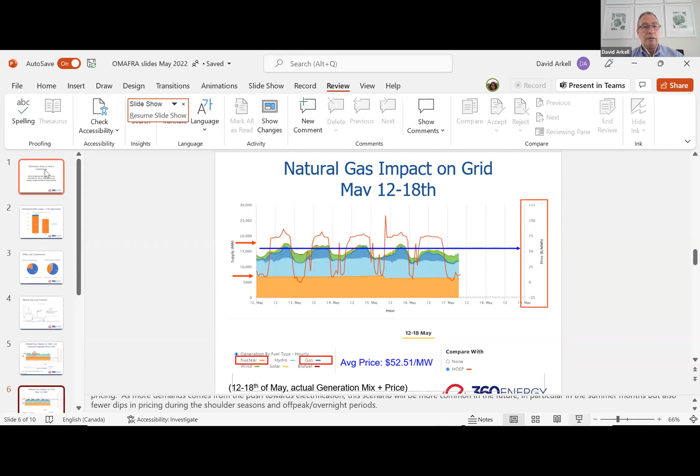Thank you again, and I guess really my job is to set the table for our two other guest speakers, because they're going to be talking about technology that you'll want to be looking into as the markets continually evolve and change. So my message to all the listeners is that it's really important when you're looking at technology that you and the pending suppliers have a full understanding of how you use energy and also future energy pricing. What I'm tasked to do today is to give you a heads up on where the market is, examples, and then what things you should be thinking about when you're looking at these different technologies.

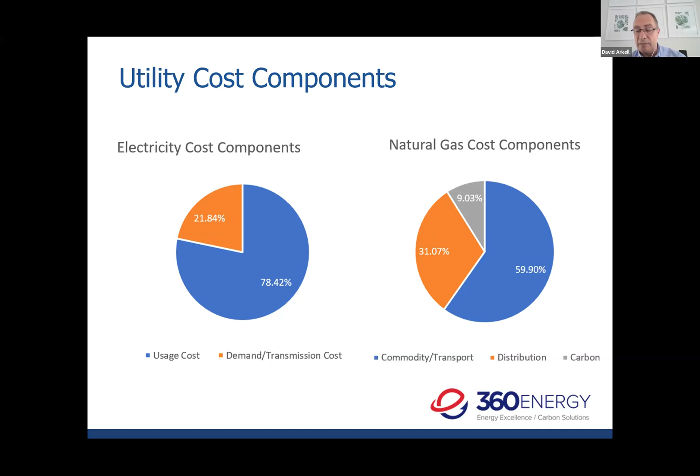And for natural gas, you can see we've broken it into three separate areas. We've included the commodity and transportation together, and then the distribution, that would be your local distribution company, their breakdown, and then there's a carbon cost associated with that, which you may also be mindful of and that may be impacted by technology you choose going forward.

Since the pandemic, if everyone can recall, oil for a day or so was trading minus $40 a barrel. And that impacted natural gas pricing itself, but it also scared some producers from drilling and doing additional development of natural gas. Then on top of that, in Europe, there was a shortage of natural gas. The money being spent for natural gas is far higher than what it is in North America. So natural gas producers started to export their gas, called liquefied natural gas, to Europe and Asia. And that started to force pricing up.

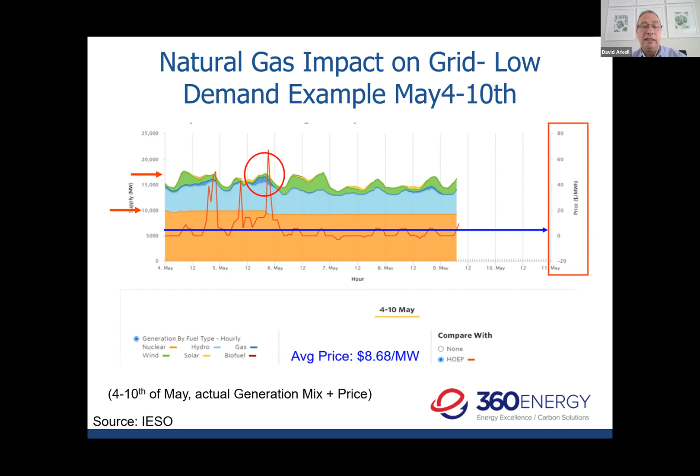During that period from May 4th to 10th, the average pricing in Ontario for the electrical market was less than a penny. Remember, there's transmission and distribution costs on top of the commodity. But in summary, it was pretty cheap. And that has been the case for many years because we've had excess supply of generation, and quite frankly, natural gas has been cheap. So I want to give you a heads up on how things change in the marketplace and how you have to be mindful of how this impacts what you want to consider in the future.

And I apologize for the spelling error. It's May 12th to the 18th. This is the next week, and it's a whole different game. So I want to share with you a couple things. Again, those are generation assets that are used to produce power. The red line is the actual hourly market price.

So one thing I want to bring to your attention: in May 12th to 18th, the nuclear assets that are used to generate power shrank significantly. And when they shrink, there have to be generation assets that make up the difference. And in this case, those generation assets are natural gas. And also, you'll note the demand of the grid that was required also increased significantly.

So what am I saying to you? I'm suggesting going forward, one, with the nuclear assets, there's going to be some maintenance going on, and so they'll have to make up that difference with natural gas. If the price of natural gas is going to be higher, then certainly the hourly market price will be higher. And you can see in this case, instead of less than 1 cent, the average price was 5.2 cents a kilowatt hour. Now, remember, that's just commodity. That doesn't include the transmission and distribution costs.

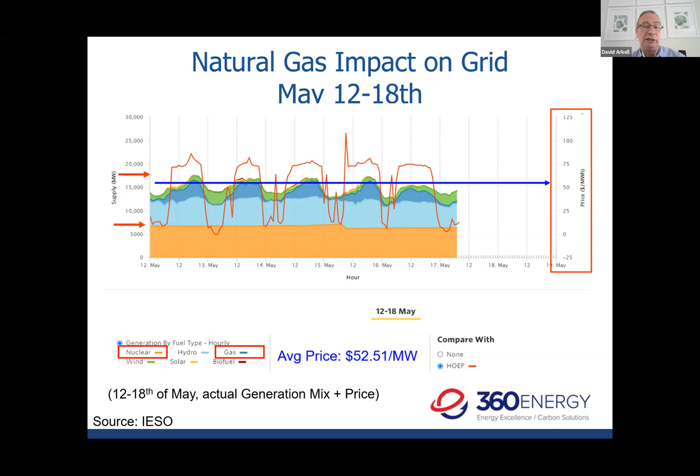So you can see the market is quite dynamic and it's changing drastically. And again, I'm bullish on where electrical and natural gas pricing is going, which may be impactful on you when looking at what technologies you want to consider.

In fact, I would say to you, Ontario, if you knew what you were doing, was the place on the electrical side to actually put lighting in, because some growers were paying 2 to 4 cents a kilowatt hour all in. But things have changed.

And in summary, as the Ontario hourly market price goes up because of gas pricing, because there are more gas generators being used, as that hourly pricing goes up, as it did in 2002, the global adjustment shrinks. So if in the past there have been benefits on the global adjustment, if you knew what you were doing, that benefit will still be there, but it will shrink significantly. There'll be more attention towards the electrical marketplace. So I wanted to make sure people are aware of what's happening in the marketplace and how that impacts you going forward.

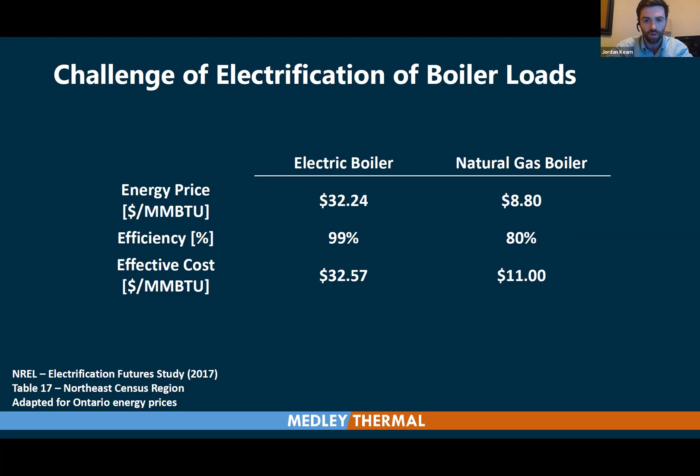For gas, you might be paying $8.80 delivered for your gas, burning that at 80% efficiency and having an effective cost of heat of $11. The electric boiler, though it's highly efficient, roughly 99%, the cost of electricity per unit energy is much higher. So even though that's a more efficient process, the cost of primary energy for electricity is significantly higher. And that's led to this wide disparity between the cost of heating with a combustion boiler and an electric boiler. And historically almost everyone has used gas boilers as opposed to electric boilers because of this difference in the economics.

And the study that put this assessment together originally, I think they summed it up very well. They said that even though electric boilers tend to have lower capital costs than gas boilers, and are more energy efficient, it just doesn't overcome the fact that electricity typically is about 3 times as expensive as natural gas on an energy basis. And that's a steep economic hurdle to overcome if you are looking to electrify your thermal loads as part of a decarbonization strategy. I think this analysis is completely right.

It definitely reflects the history that has led us to combustion boilers being the dominant source of steam or hot water heating, but it neglects one factor that we think really makes a difference and enables electricity to become economic in certain circumstances as a heating fuel. And that is, it neglects the temporal variability of electricity costs. And David, I think, really teed it up well for me. He said in his presentation that the power market is quite dynamic, and that's very, very true.

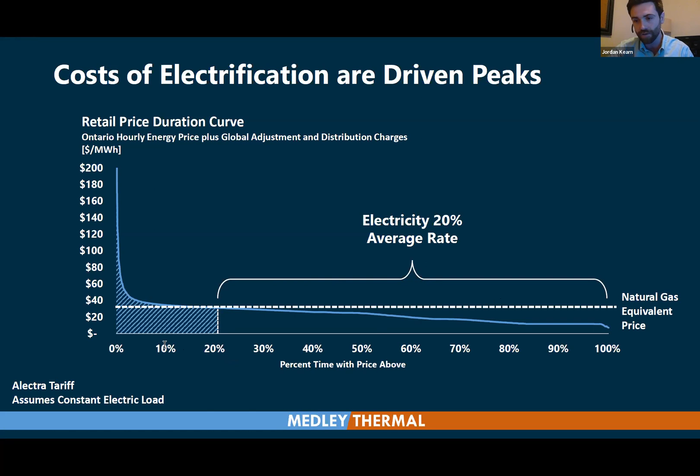And as David mentioned, a lot of things are changing. I really should, he's reminded me, update this analysis just based on how dynamic the market has been over the past few months. But the general trend still remains true, and may even be more extreme given the rapid increase in natural gas prices. So that's really the first and primary lesson I just would love to teach anyone who is a major energy consumer. And again, this goes back exactly to what David said, that being in control and understanding how you consume energy is extremely important, especially in a market that is this dynamic, where peaks have such a dramatic impact on your overall cost of energy.

And again, the other lesson that I think comes out of that is when electricity is used is much more important than how much is used. So again, if you're consuming in those off-peak hours, it doesn't necessarily matter if you are consuming massive amounts of electricity, as long as you are being well behaved with that load and using that at a low impact period. The price of that energy can be very low, but a little bit of power at the wrong time can really drive your costs.

The second point, again, David really teed it up well for me. I don't need to go into this too much. He gave a lot more detail, but even leaving aside the geopolitical issues that have led to rising gas prices, the pullback in investment in oil and gas drilling and exploration due to the pandemic, leaving all of that aside, even the increase in the federal carbon price alone would be leading to a 25% increase in gas prices for growers over the next 8 years.

I know growers get a discount due to their trade exposure on that carbon tax, but even including that reduction in the carbon tax, the carbon tax increases alone that have been planned by the federal government will be leading to that 25% increase, even if nothing were to happen on the geopolitical side.

So again, I don't think I need to dwell on this because David hit it so well, but we are looking at a world where we probably also have a bullish view of gas prices just because of a number of factors, including the carbon price increases that are scheduled to take effect over the next few years through 2030.

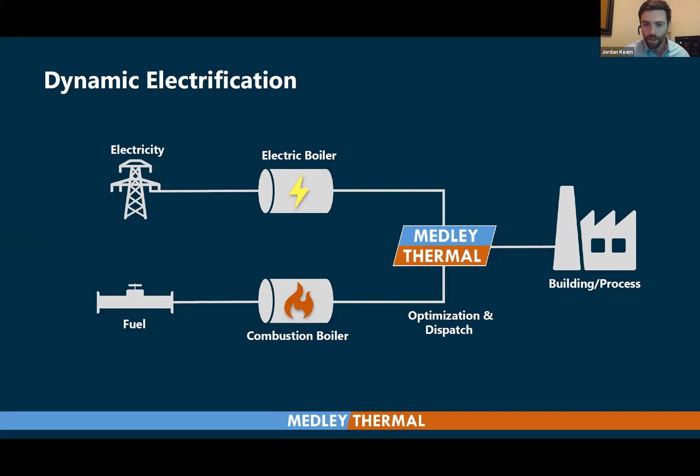But then after that system is installed, we also provide optimization and dispatching software that lets you use your new hybrid asset in a way to respond to those dynamic conditions that both David and I described. So when you run into a week where gas is really what's driving the power sector, it doesn't make sense to use an electric boiler. You should just be using gas in your combustion boiler. But when you hit a period of time where the power market is being primarily driven by wind, by nuclear, by hydroelectric, power prices tend to fall, and at those times it makes sense to electrify.

What we've seen historically in Ontario is we can reduce boiler energy costs by about 25 to 40% and electrify about 60 to 80% of the thermal load. And since your power in Ontario is very low carbon intensity, especially at the times when we would be consuming power, that's almost a 60 to 80% reduction in emissions. And our systems are best situated for large facilities that have larger thermal loads of about 500 boiler horsepower typical load or more. But for those large facilities, we are seeing about a 4-year expected payback period for the projects we're working with in Ontario right now.

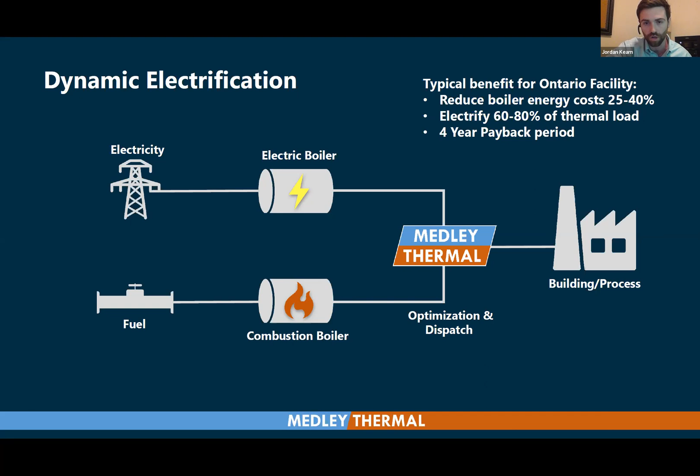The last thing I'd like to add is if you are looking down the road, interested in electrification, but not sure, looking beyond that sort of 60, 80% I mentioned, to how you're going to get to 100% zero carbon. We've had some facilities where they've been looking at potentially replacing that combustion leg with some other type of zero carbon backup system. And that could be renewable natural gas, biomass or biofuel, hydrogen, or even some battery or thermal storage, but basically some other stored source of energy that you can release to heat your greenhouse when power prices are high.

What's nice is that's not something that you have to take on now. This is a project that you can add on immediately with no regrets, and then come back and look at getting that last 20 to 40% decarbonization down the road as some of these other less mature technologies come online.

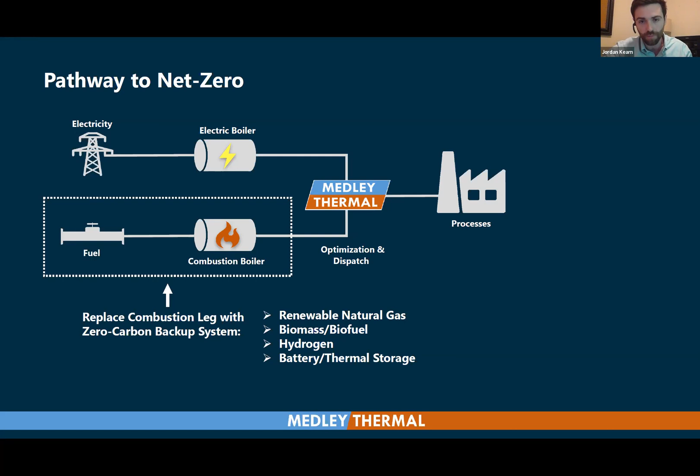The last thing I'd like to mention is the impact on global adjustment and Class A designation. So our loads are highly flexible, and to make the economics work, you have to be a large enough power consumer where you can get very sophisticated time of use rates that includes the global adjustment peak avoidance Class A designation.

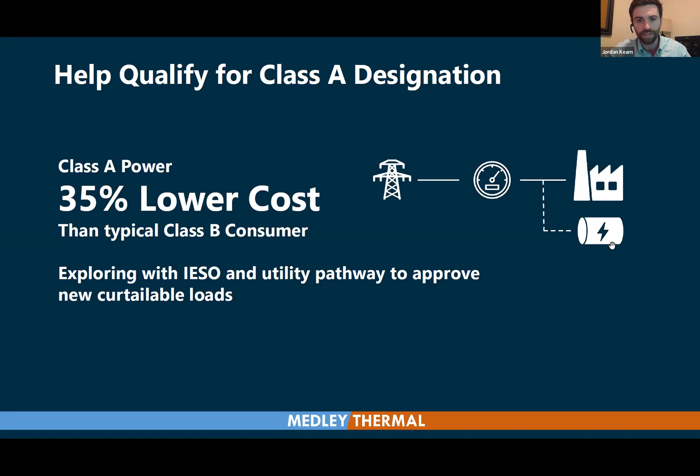If you are a facility that currently, maybe an unlit greenhouse, doesn't have significant electric loads, but you have a lot of acreage and you have a lot of heating loads, the added electric boiler load could help you qualify for that Class A designation, which would also have co-benefits for reducing your power costs by allowing you then to be a dynamic consumer on the power side, and pull back on power consumption for your other loads at times when we're looking at a global adjustment peak event. So if that's something that is interesting to you, I'd be happy to talk to you about it.

Yeah, if you're a greenhouse and this is something that you're interested in looking at, I would actually start by reiterating David's point that the best thing you can do is have a good sense of how you are currently using energy. If you reach out, that'll be the first thing I ask, is some information on your current loads, which we could use to then kind of put together a sense of what dynamic electrification of your greenhouse might look like. So I would definitely start there.

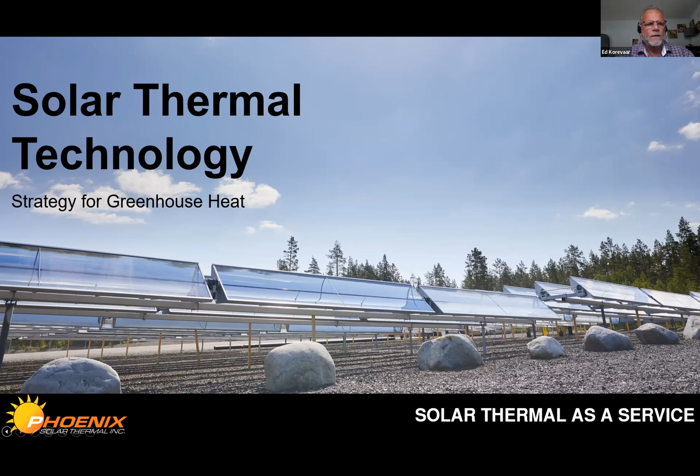So we are introducing solar thermal technology as a strategy for greenhouse heating. So by way of introduction, I first wanted to just talk about CEM Engineering and Phoenix and the connection between our two companies. A number of people in attendance today may be familiar with CEM Engineering. They are a thermal power engineering firm based in St. Catharines. The founder is Martin Lensink. They deliver various thermal power solutions, including a number of feasibility studies and anaerobic digesters in the greenhouse industry. For example, both at Bayview and at Vandermeer greenhouses, they were involved with those digesters.

As part of delivering thermal power solutions, CEM founded Phoenix Solar Thermal in 2021. What we provide is turnkey thermal solutions to the marketplace. So that would involve providing a solar field, the engineering required to tie into the greenhouse process, the installation, and then post-project service contracts. We are based in St. Catharines. We are currently the exclusive supplier for Absolicon solar thermal collectors. And our hopes and plans are that by next year we will be establishing a production facility within the Niagara region.

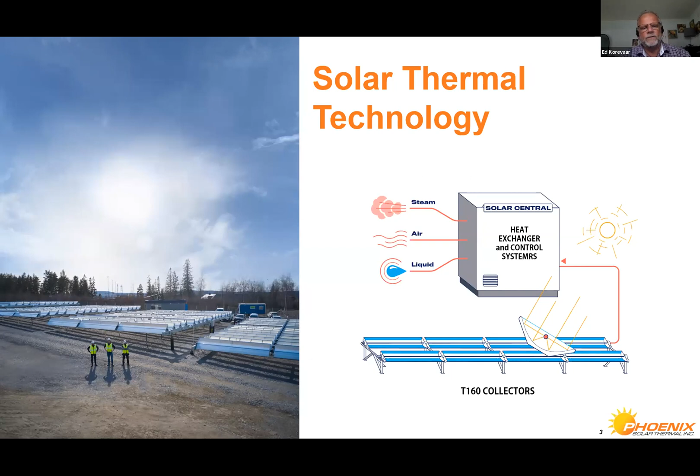So what is solar thermal technology? Basically, it's collectors that have been designed specifically for industrial applications, collecting energy from the sun, and in turn, through a heat exchanger, transferring that to either steam, air, or liquid for a greenhouse operation or industrial operation. The solar central panel that you see there is both a heat exchanger and an automated control system, which allows the collectors to track the sun throughout the day so that we have optimum performance. So this is different than what most people think about with solar PV panels for generating electricity. What we are doing is generating hot water and steam.

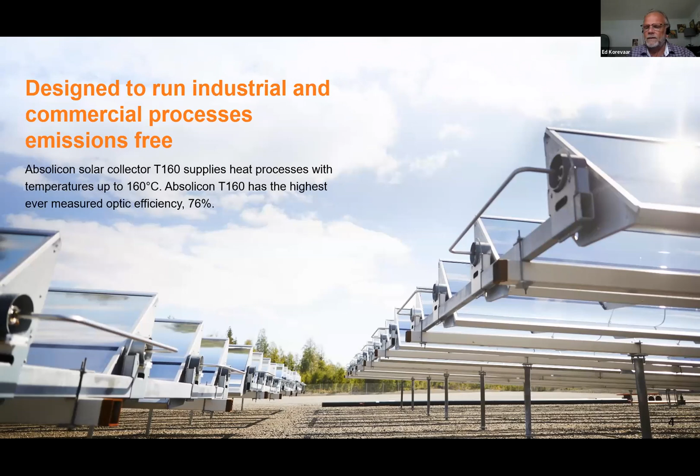The T160 collectors are designed specifically for industrial applications and can deliver up to 160 degrees C. And they have a very high efficiency, the highest in the industry, of 76%. So just as a comparison, a typical solar PV panel would be 20%. At a 76% efficiency level, we are able to have a field that is much smaller than a comparable solar PV field, and through that, deliver power to the greenhouse.

The design of the reflector has been a result of 20 years of R&D by Absolicon. The reflector itself, basically like a magnifying glass, is collecting the rays of the sun, concentrating those rays to the middle, where we then have the receiver tube that is typically flowing glycol as a medium for collecting the energy. And then as that's pumped back to the solar central unit, we are converting that to steam or to hot water. The collectors have a glass cover, which is self-cleaning in terms of the surface of the glass, and also gives protection to the collectors.

I should also mention that the tracking of the sun, the movement of the collectors, also leads to then being able to turn the collectors over at night, which reduces contaminations and helps with preventive maintenance of the units.

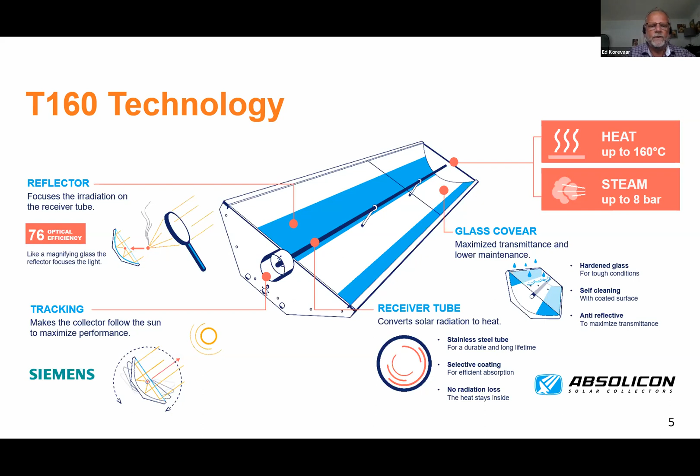The design of these collectors is quite involved. It involves a number of patents that either are established or are pending. And not only is it 20 years of research there, we now have had pilot installations in place across various countries, both in Europe and in Africa, over the last 10 years.

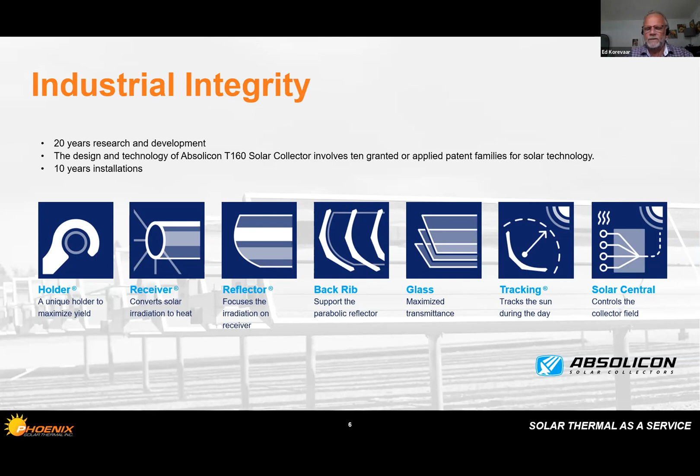So for many of you listening today, the idea of a solar thermal panel might be quite familiar if you're using, for example, a heating system on the roof of your garage to heat the water for your pool. What's unique here is that it is an industrially designed product. The modular construction allows for various ways of installing the field, be it on the ground, which would be the lowest cost, on the roof, or even creating an overhead superstructure, for example, over an existing tank farm or over a parking lot.

So why people are looking at solar thermal: as we've been reminded this morning by David and also reaffirmed by Jordan, there's more and more attention being given to reducing our carbon footprint. This has become a major priority for Fortune 500 corporations. It is a way of greening your brand and the recognition it receives in the marketplace. And also, as we'll talk about a little further in a moment, it allows you as greenhouse operators to align yourself with major priorities of your end customers.

It brings savings in terms of the tax credit or the carbon tax. And as was highlighted on one of Jordan's slides, the carbon tax is only going to be increasing from year to year. It's currently at $50 per ton, and it will be increasing by the rate of $15 a year, and will only bring more and more cost to operations. In addition to providing savings on the carbon tax, it also reduces your energy costs.

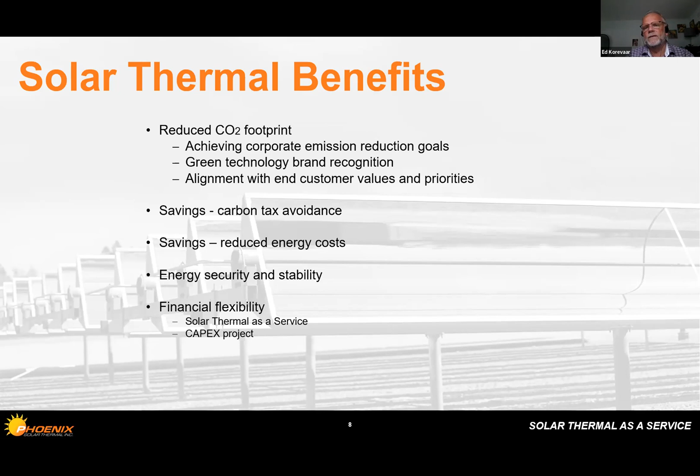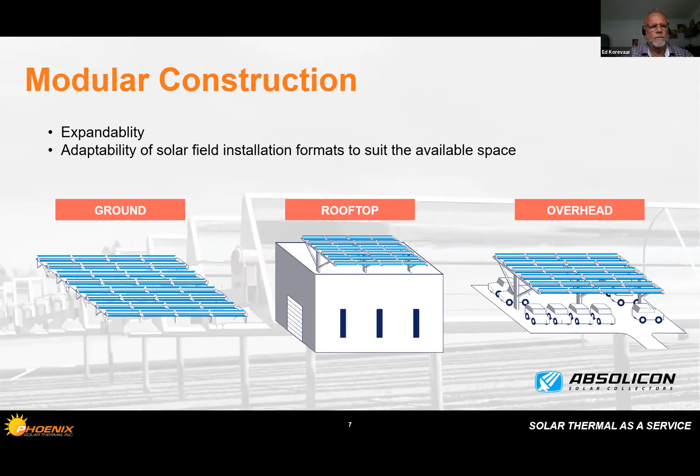So here is an example of a simulation that we would do in looking at a greenhouse. We identify space for installation of the solar field. For example, in the example that we ran very quickly for our presentation today, here is a solar field of about 12,000 square meters. The aperture area is typically about half of the footprint of the solar field, so we're looking at just under 6,000 square meters.

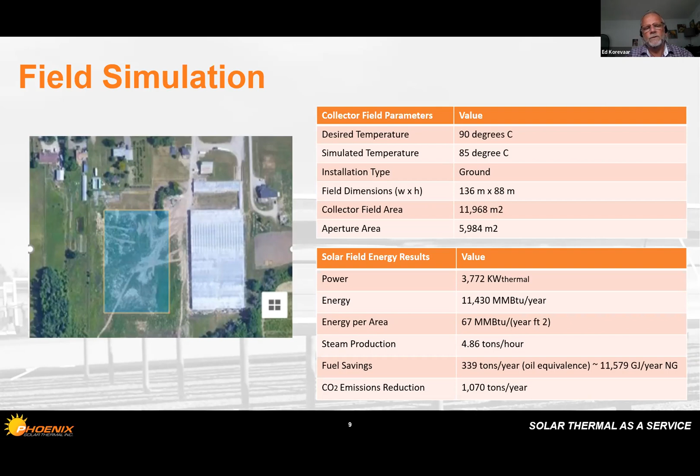This magnitude of solar field would produce 3,700 kilowatts of power, and over the year, with the figures you see below, it would produce steam of 4.86 tons per hour, and the result would be savings of 339 tons per year of oil equivalent, which works out to roughly 11,579 gigajoules per year of natural gas. And through that it would result in carbon emissions reduction of just over 1,000 tons per year.

The final thing I'll highlight is the point I made about how this also strengthens your brand with your end customers. Net zero targets have become a major focus for Fortune 500 companies. When you look at the Walmarts, the IKEAs, the Home Depots, just as examples of those drawing from the greenhouse industry for floral products, or Loblaws when it comes to vegetables, we see that in every case, driving toward a net zero corporate goal is a key priority.

And so therefore, an added benefit in looking at this technology to displace the need for natural gas is that it ultimately aligns yourself potentially quite strongly with what has become a front-of-mind priority for our mutual customers out in the marketplace.